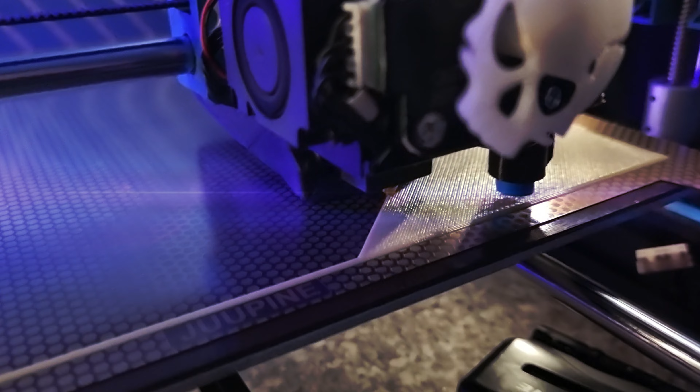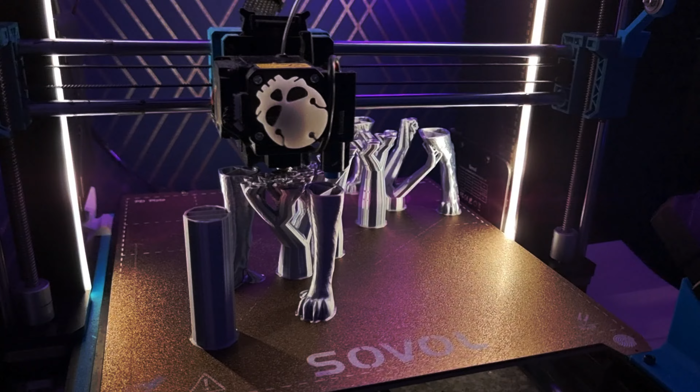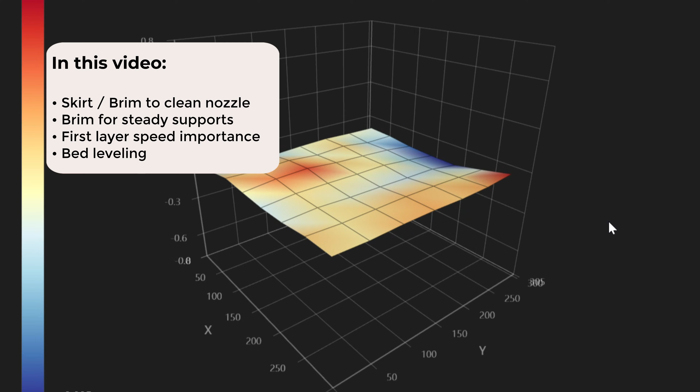If you're using Cura, this video is packed with essential tips to improve your prints. Today, we'll cover 4 key settings and techniques that can transform your printing experience. Skirt and brim settings for nozzle cleaning, how brims stabilize tree supports, slowing down the first layer for better adhesion, and the importance of bed leveling. Stick with me, and let's dive into these one by one.

Let's start with a simple, yet highly effective tip. Using a skirt or brim to clean your nozzle before the actual print begins. A skirt is an outline printed around your model, while a brim adds extra lines connected to the base of the model. Both help ensure your nozzle is primed and ready.

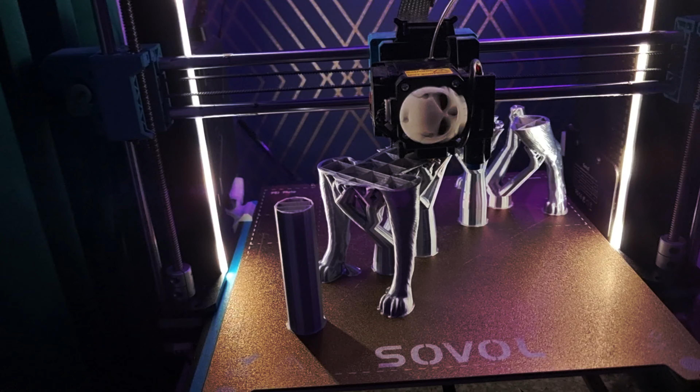In Cura, go to the Build Plate Adhesion section and select Skirt or Brim. I recommend setting the line count to 3 to 5. This not only clears any residual filament in the nozzle, but also helps establish a steady filament flow. Now that your nozzle is clean and your filament flow is consistent, let's look at how brims can help in another important area: tree supports.

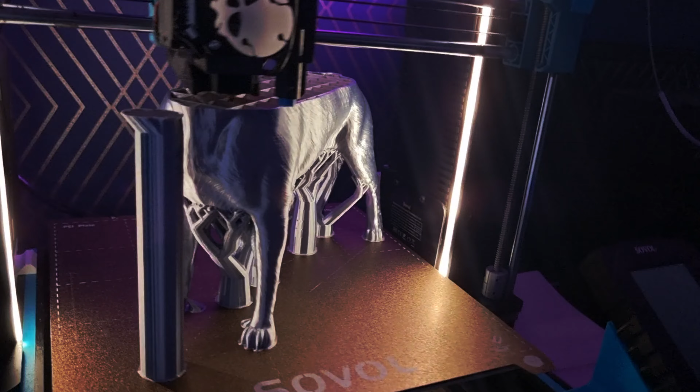Tree supports are fantastic for reducing filament waste, but they can sometimes be unstable, especially for tall or detailed prints. This is where brims come to the rescue. By printing a brim both inside and outside the base of tree supports, you can add much needed stability.

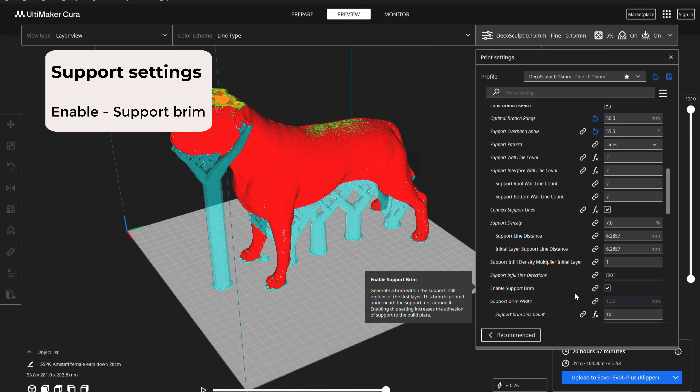To set this up, go to the brim settings in Cura and change brim location to everywhere. Don't forget to enable support brim in the support settings section. This extra support prevents the tree supports from wobbling and ensures cleaner overhangs. With the brims providing a solid foundation, you're ready to tackle even the trickiest overhangs.

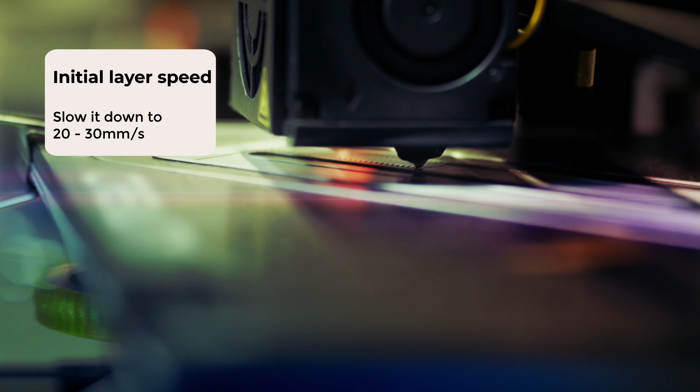Speaking of strong foundations, let's move on to a critical part of any print: the first layer. The first layer sets the tone for your entire print. A common mistake is printing it too fast, which can cause poor adhesion. In Cura, slowing down the first layer to 20 to 30 millimeters per second gives the filament more time to bond with the bed. To adjust this, head to the Speed section in Cura and tweak the initial layer speed.

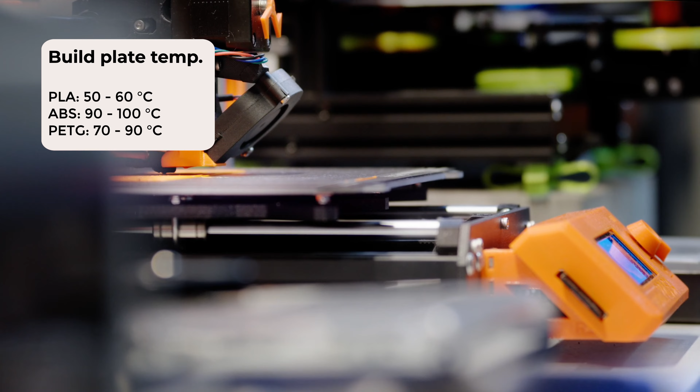This one simple change can dramatically reduce issues like warping or detachment. Also, bed temperature plays a crucial role in first layer adhesion. For example, PLA typically adheres best at 50 to 60 degrees Celsius. ABS requires 90 to 100 degrees Celsius, and PETG works well around 70 to 90 degrees Celsius. We'll dive deeper into filament-specific temperatures in a future video.

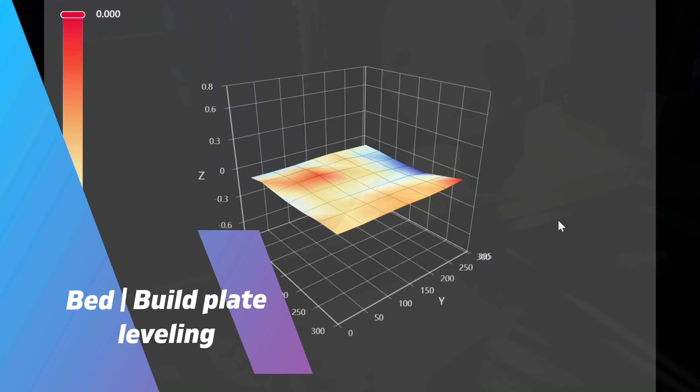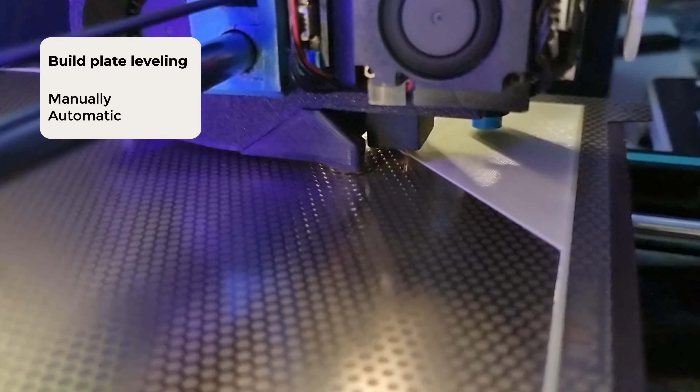Of course, even the perfect first layer speed won't help if your bed isn't properly leveled. Let's look at why that's so important. These days, you can find different methods for bed leveling, from manual adjustments to fully automatic systems. But the principle remains the same. Your nozzle needs to be the perfect distance from the bed for consistent, high-quality prints. Paper methods don't always work the best, unfortunately.

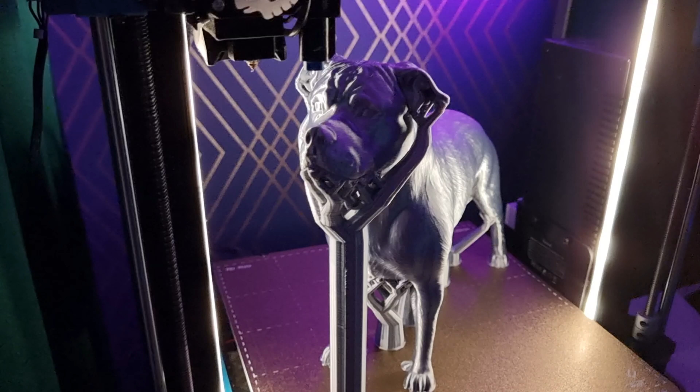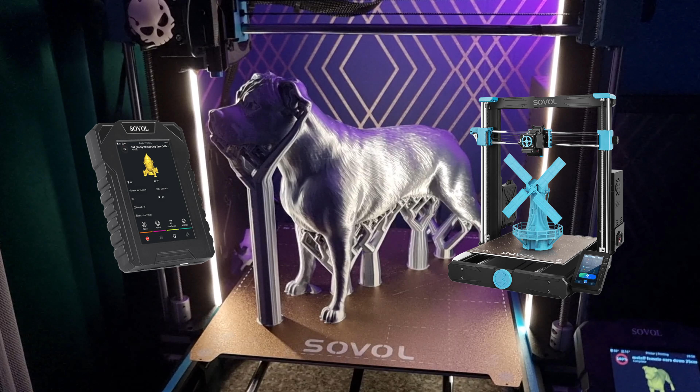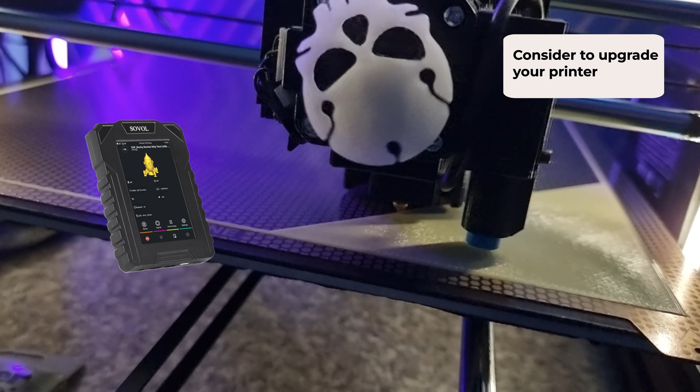These days, there are many modifications available for specific printers, and you can find a wealth of guides in forums or YouTube tutorials. Personally, I'm using a Klipper screen with my SV06 Plus printer. This setup allows me to monitor my overall bed level directly on the Mainsail interface. If you're struggling with bed leveling, I highly recommend investing in some upgrades. Not only will they reduce imperfections in your prints, but they'll also save you from many headaches down the road.

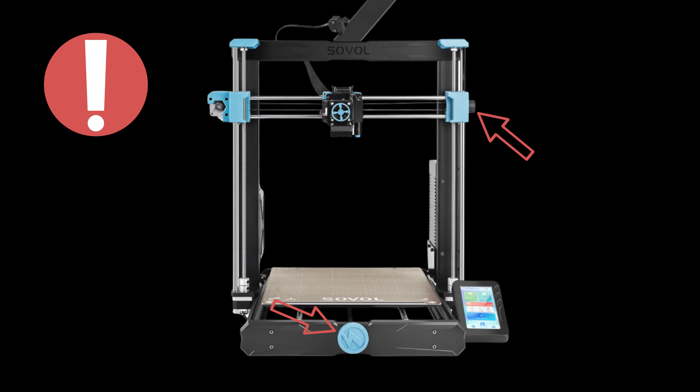Also, make sure that your nozzle's Z distance is the same in each corner. Double-check your frame alignment, ensure all bolts are tight, and verify that your belts are correctly tensioned. Additionally, confirm that your Z rods are properly aligned. If you're unsure, I'm confident you'll find detailed instructions for your specific printer in other creators' tutorials. With a leveled bed, you're all set for a successful print.

Let's wrap things up with a quick summary. Today we covered how to use skirts and brims to clean your nozzle, stabilize tree supports with brims, slow down your first layer for better adhesion, and ensure proper bed leveling for consistent results. By using these Cura settings and techniques, you'll see noticeable improvements in your prints.